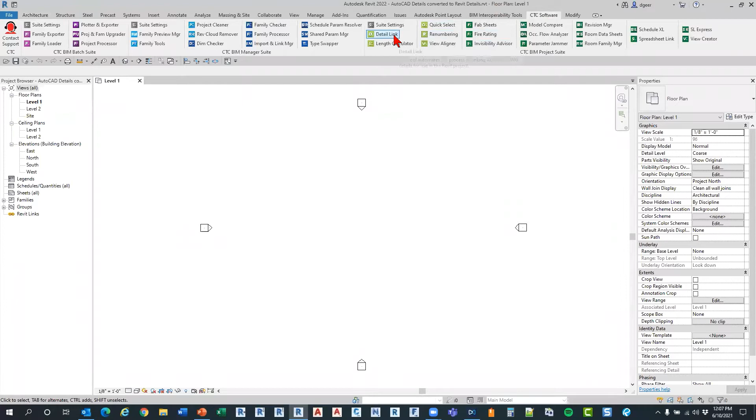Okay, thank you. So I'm going to come over to our CTC tab here, and I'm going to grab the detail link tool. What this allows me to do is browse out to my server where these details are located. I've just got about 4 here. I could go grab one that's got 1,000 details. It's up to me, but I don't want to inundate everybody with 500 details. I can bring in just 1 or 2 details, or I can select all details and add them all at once.

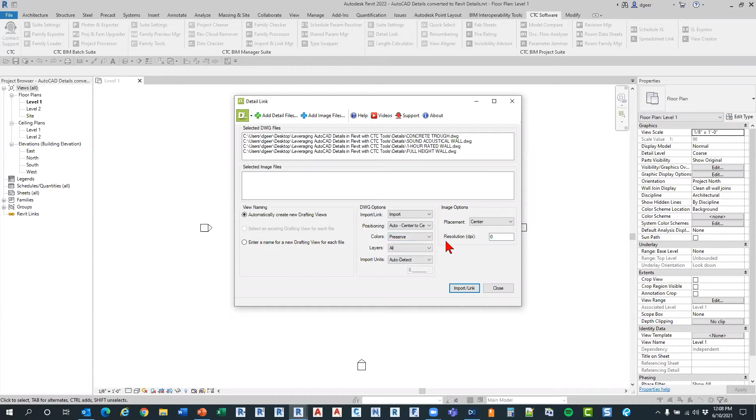I'm going to go ahead and hit OK here. When I do this, how do I want these items to come in? First, I'm going to tell it to import versus link, because I want to take these AutoCAD details and convert them over to Revit details. I don't really care about positioning so much, but I could. Do I want it to preserve colors or black and white? I'm going to tell it to preserve colors, because one of the other tools I want to use needs to know that I've fully translated the AutoCAD detail over to Revit information. How do I want to handle layers and import units, especially from manufacturers? I don't know, I could say visible, or I could say all. I typically don't know, so I'm going to say all.

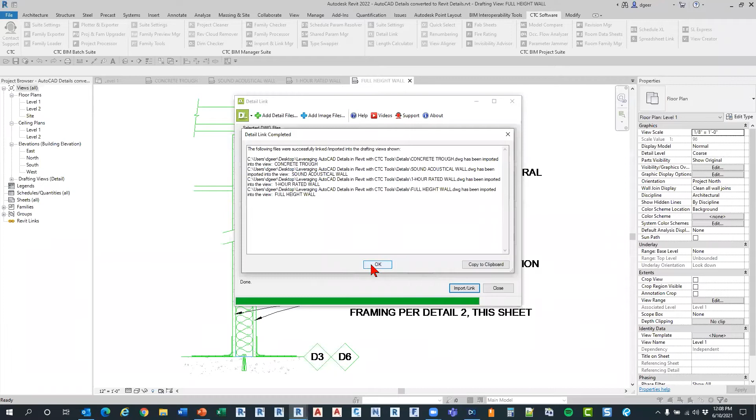I'm going to go ahead and hit import link, and it's going to bring in all those files and give me a report of what's going on with those files, so that if I had any errors, it would give me an error log.

That quickly brought in those 4 AutoCAD details. I'm going to hit WT on my keyboard, close out of level 1, and then hit ZA on my keyboard to zoom all to fit. So now I've got these AutoCAD details, and you can see the colors and items of that nature.

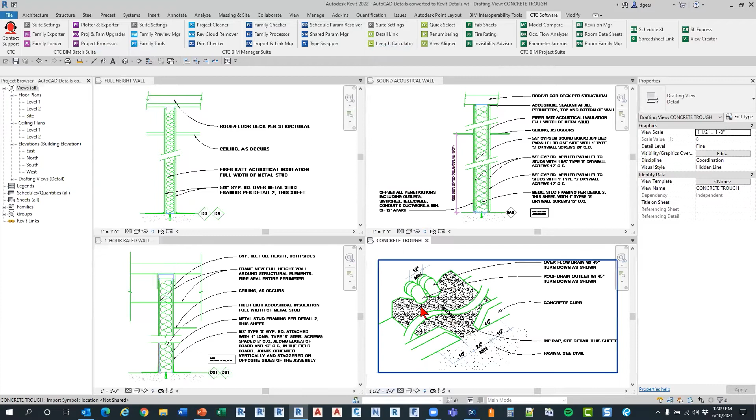One thing it didn't do was set the appropriate drafting view size for these details, so I'm going to come in here and set these to the appropriate size. This last one right here is actually 1.5 inches. Well, it didn't look like it changed anything, because these are still seen as an imported symbol.

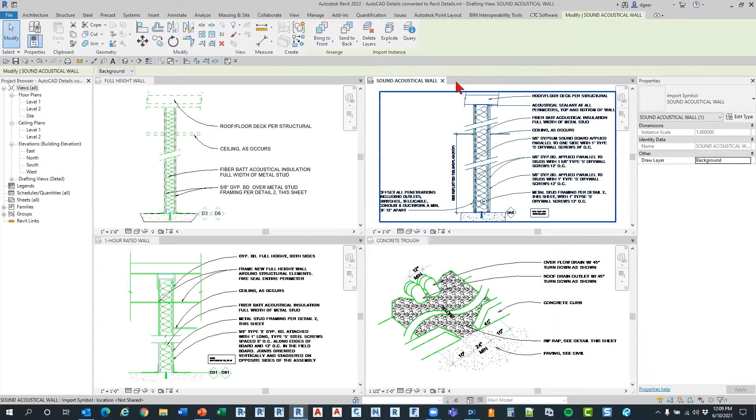One of the things I really need to do here, that we always say don't do in Revit, is come in and import and fully explode, right? It leaves a lot of AutoCAD residual information that Revit does not like. So I'm going to go in here and fully explode all these items, which everybody knows is always a big no-no in Revit. The reason I want to do that is because I want these items to come over properly, so that if I change scale, the text and whatnot will change with it.

So now I want to get rid of these items in here and say, okay, you're going to be on the appropriate line style. I could come in and say, hey, you're really on thin lines. That's a lot of picking and clicking to do.

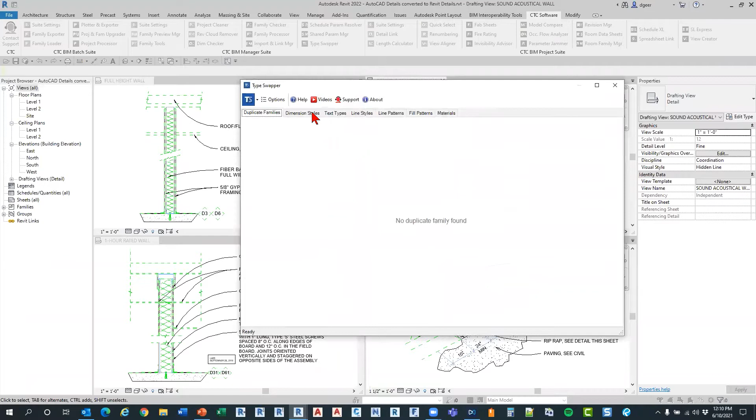What I'm going to do to speed myself up is use the CTC tools type swapper. This allows me to come over here to the text types, and everywhere you see a check mark means those are approved text types available for me to use, approved by my company. You'll see all these with 1 hour, concrete, sound, acoustical - those are the ones pulled in from AutoCAD.

I could sort it by count type and say, okay, these elements all have something on them. My sound acoustical wall, I can say that they need to be an 1/8 inch arial because they were really an 1/8 inch arial in AutoCAD. My 1 hour, same thing. My concrete, however, those are 3/32 inch arial, and I've got 9 here on this full height wall, so I'm going to set those to 1/8 inch. Acoustical sound 3, I'm going to set to 16th and 16th, and there's one here I'm going to set to an 1/8.

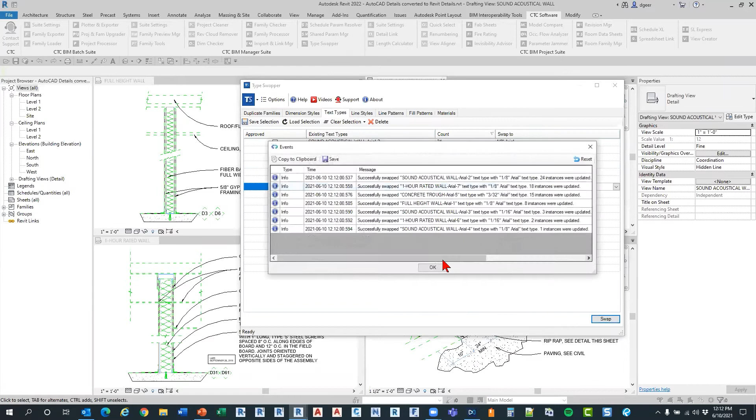So what I'm going to do is go ahead and swap those out. Now if I go back into each view, you'll see that everything is now on an appropriate Revit text style or text type.

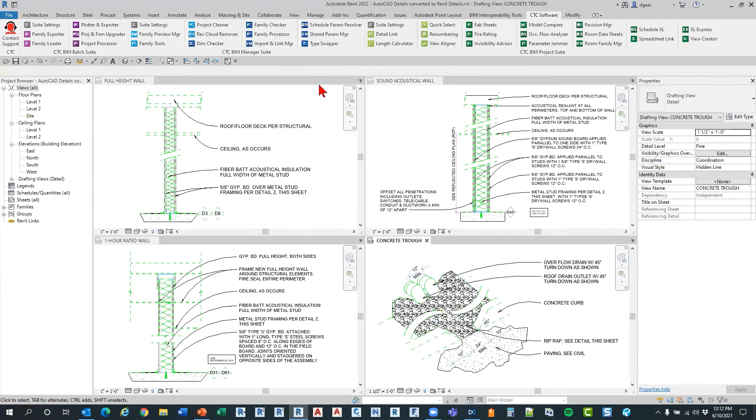So if I go back into the type swapper, if these elements had dimensions, I could change out the dimension style - well, none of these have dimensions on them. You saw earlier where I could go through and actually pick the different lines and change them, but that's a lot to do, especially if there's 625 of them.

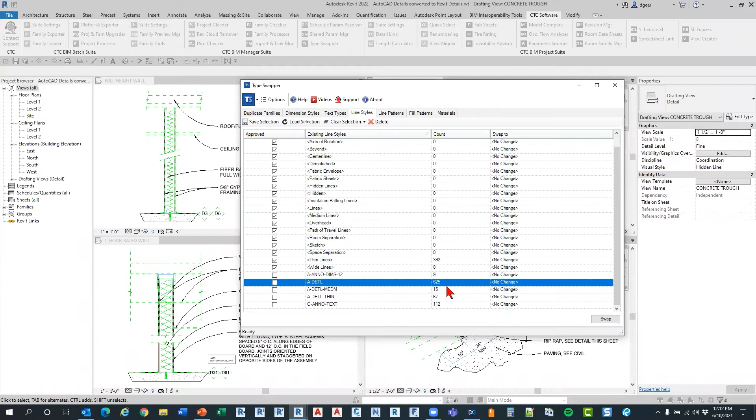So I'm going to come over here to a detail, and I know those need to be thin lines. Any of these annotation symbols, I'm going to make them thin lines. Obviously detail thin - I would assume if they're using AIA standards or good national CAD standards, these are going to conform to medium thin lines. Once I have them all set up here, I'm going to hit swap.

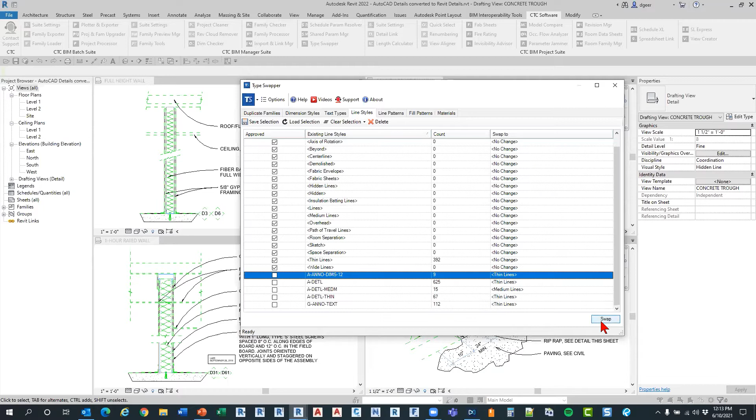Now, I will tell you, ladies and gentlemen, this is going to take some time, so we're going to have a little dead space here. When I launch this, I'll see if there's any questions I can answer while this is going through, because I did this earlier for the 4 views we have. It's approximately going to take 1.5 minutes per view, so we're looking at around 6 minutes for the type swapper to go through and change all these out. So if there's any questions, feel free to ask.

So where do you get the CTC software? That's a great question. In the United States, ATG USA is the authorized reseller for CTC software. If you're in Canada, SolidCAD is your authorized reseller for the CTC software.

Now I'm actually using 2 of the different suites here. Okay, hold on just a second, I see that there's some questions here.

So Dan, to answer your question - you asked, you normally wouldn't want to fully explode imported objects in Revit, but you're saying that to use these CTC tools, you do need to, and yes, that is correct. I need to, in order to be able to put them on the proper Revit line style, the proper Revit text type, to get rid of all that AutoCAD information. I'm hoping that answered your question, Dan.

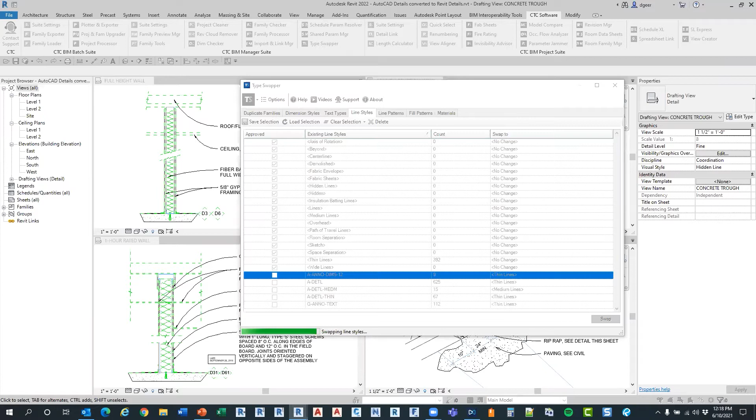And we're almost getting, hopefully, towards the end of the CTC tools Type Swapper conversion. Again, I'm only doing 4 details, but if I was trying to convert my AutoCAD detail library and having to go through and do this on every detail, that would be extremely time consuming, if I want them to be truly Revit details and no longer AutoCAD details. Because these 4 details are taking us approximately 6 minutes, I would definitely look at setting this up to go before the end of the day, and let it run through the night.

And then when you come back in, I know I'm going to get a message saying that one of the elements needs to be disjoined, but hit that and then it's done doing the conversion. And then all you've got to do is minor cleanup, and then you have those AutoCAD details now as true Revit details.

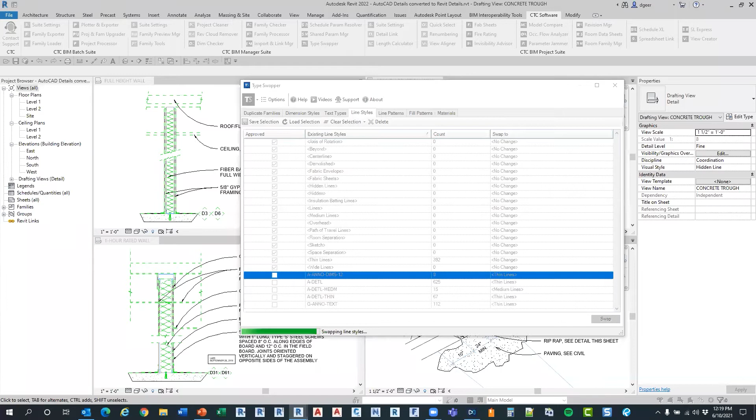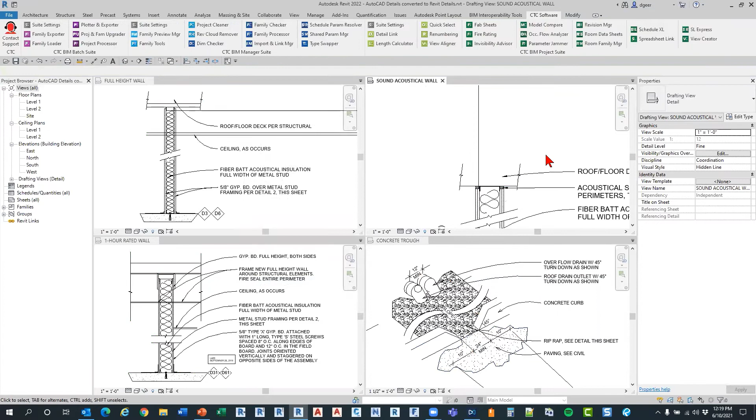All right, there's my unjoined elements like I was telling you earlier. Here's my report based on what was going on. I'm going to go out to Type Swapper, and you can see it swapped all those out for me, and it put it on the appropriate line type. I don't know why it wants to move this for some reason, but I'm going to go ahead and bring that back, delete that line type there. That cleaned that up.

Again, it moved this one out. Why, I don't know. But hey, you could actually get the same thing from whatever CAD details you may pull off the internet from your vendors. Same things could happen with them. So I'm just kind of coming in and doing a little cleanup work here. And then I'm going to draw a detail line here, because I want it straight and not on an angle. And that one looks like it's cleaned up. This one I've got to clean up here. And so now I've got all those 4 details.

They are now converted. Now I could use the CTC tools Type Swapper for fill patterns, but I find that that one doesn't do what I want it to do. It will go into this filled region here, edit type, and change out the fill pattern that is assigned to it to the appropriate one. But what I typically want is for this fill pattern to actually be the fill pattern that is in Revit. So I'm going to come in onto one of these views, right click, select all instances, so that it grabs all those fill patterns at once, and then I can change them to concrete.

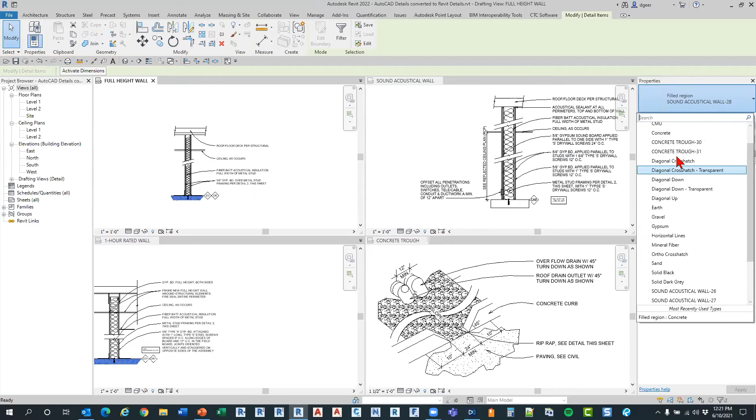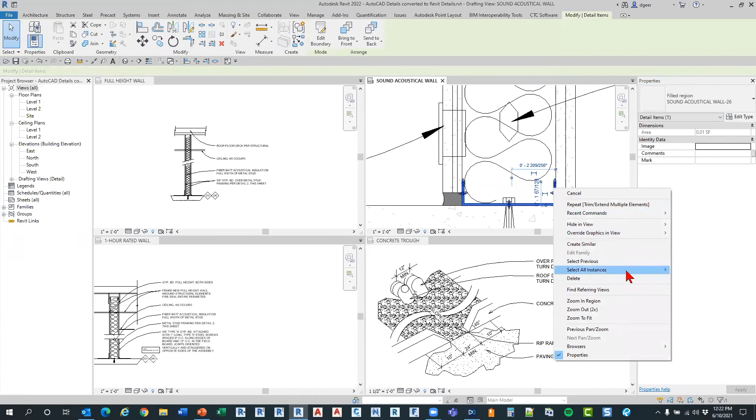Same thing here with my gypsum board. Almost forgot what it was there, so sorry, I had a pause there for a minute. Change those out to gypsum board. Got a few solid fills here that I want to switch out. Same thing here with the solid fill for the stud. And then I'm going to do the same thing here on my civil detail. And that is not supposed to be concrete. That is supposed to be gravel, and that one is supposed to be sand.

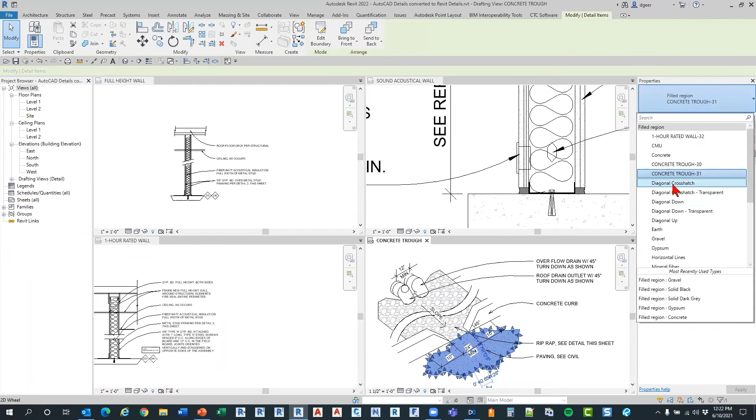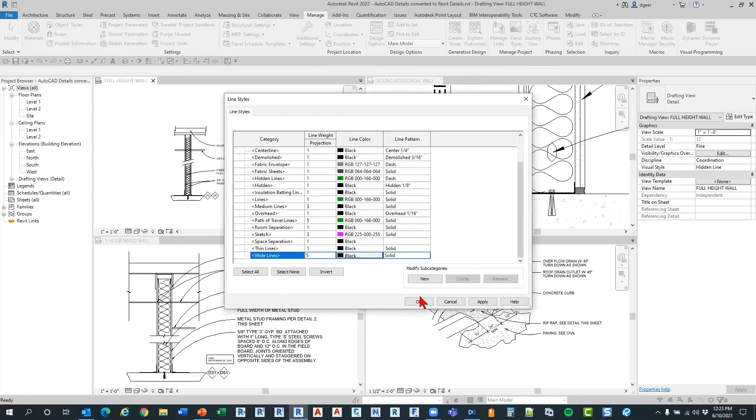So a little minor cleanup, but once I got everything done, now all I have to do is come in through my Manage, go ahead and Purge Unused, and then I can go to my Object Styles. Nope. Stand corrected. I'm going to go to my Additional Settings. I'm going to go to Line Styles, and then I can now get rid of all these AutoCAD layers that no longer have to be tracked and viewed by Revit.

So now at this point, I have these details ready for me to use in Revit. They're no longer AutoCAD. I've gotten rid of all of that AutoCAD residual information, all the fill patterns. I might come back in and purge out the fill patterns and everything else. So that way I no longer have that AutoCAD information that slows down Revit.

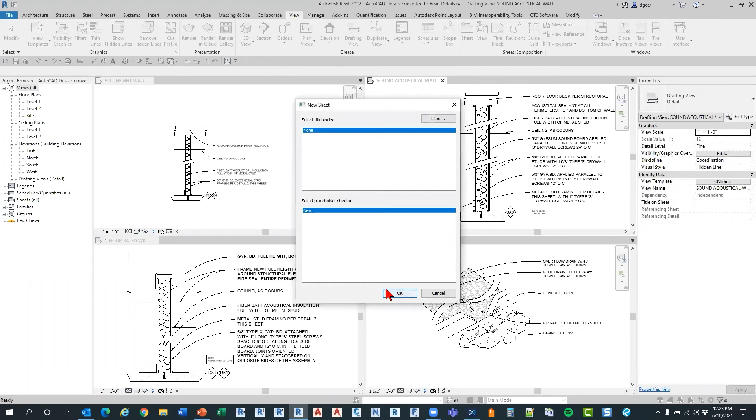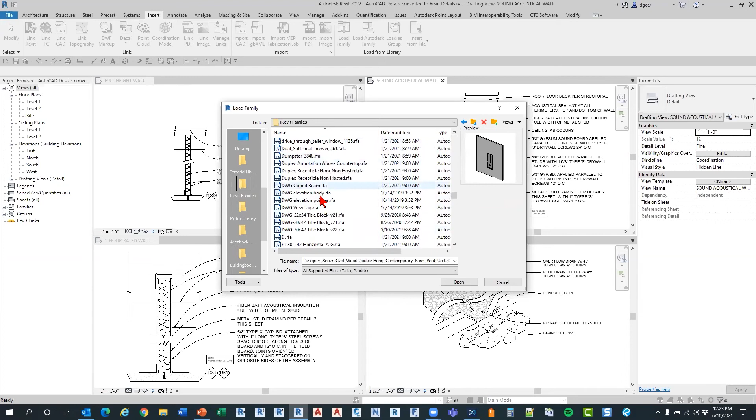At this point, I'm going to go ahead and create a sheet. And I purged one too many times, so I've got to go insert a family real quick. Bear with me while I go grab a title block. And let's go ahead and create that. So I'm going to hit WT or TW to tile my windows back and ZA to zoom all.

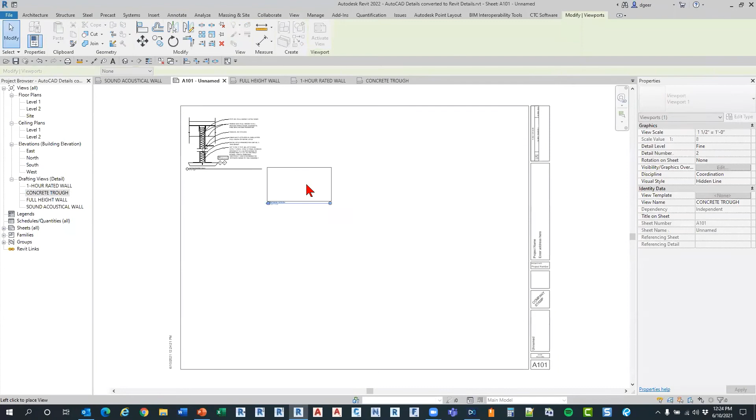I'm going to expand out my project browser here and grab all these different views. And yes, I am putting them crazy on purpose. 2, 3, 4. All right. So there is now on CTC Tools, under the free tools, this new View Aligner.

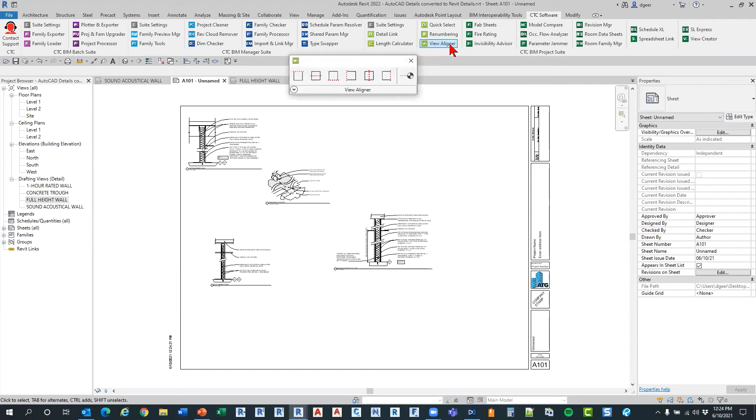And this not only works in Revit 2022, as you see on here, I've actually used this tool in Revit 2019. So if you get the new CTC Tools, they will work back for the older versions of Revit. So what this View Aligner allows me to do is come in and use the crop regions to align my views. So I could come in and say, hey, I want to top align all these views.

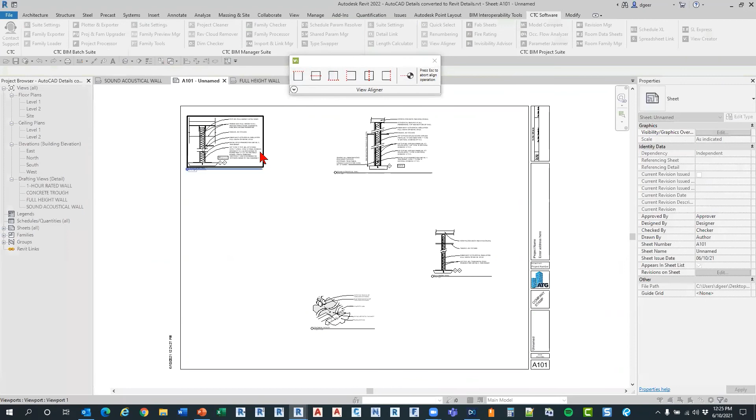And I grabbed one too many and aligned that. So I'm going to move you out. I'm going to move you down. And I could say, hey, I want to align all the bottom ones here. And I'm going to go ahead and slide this on over. And I could say, hey, I want to center you based on that one. And I'll bring you right back up.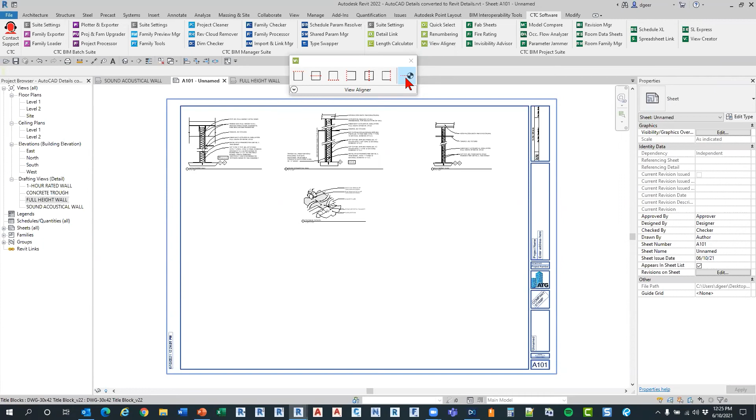Now, the very last one you see right here, it says Align by Levels. The reason why I'm not showing you that one right now is because the details I have do not have level markers in them. So if I have section cuts, elevations, whatever it is that I have, as long as it has a level marker. So I'm going to go create a new sheet here. And I'm going to come in and just drag in a couple of elevation views. Yes, I know they're blank, and I'm doing this on purpose here.

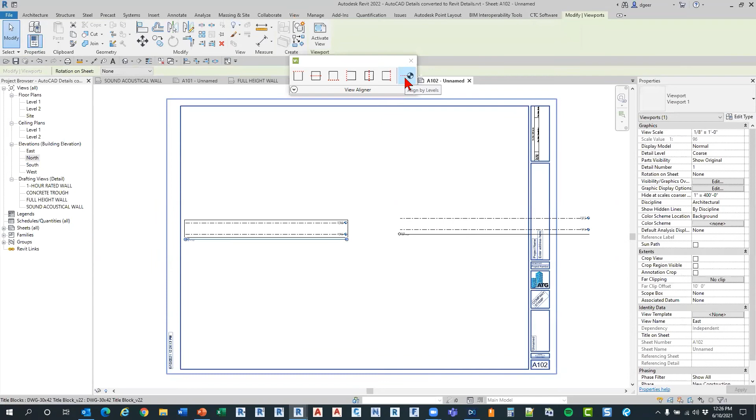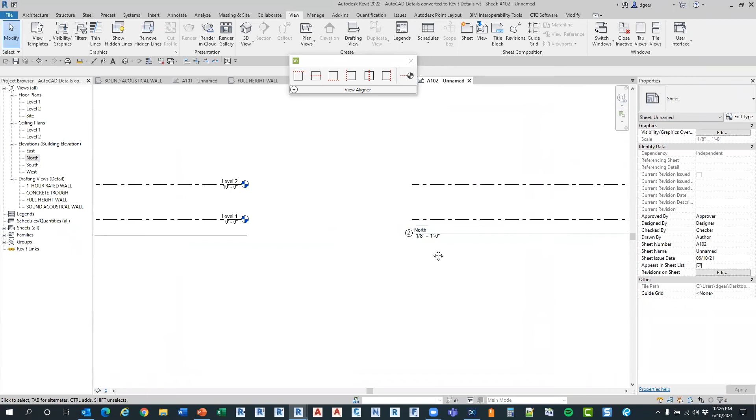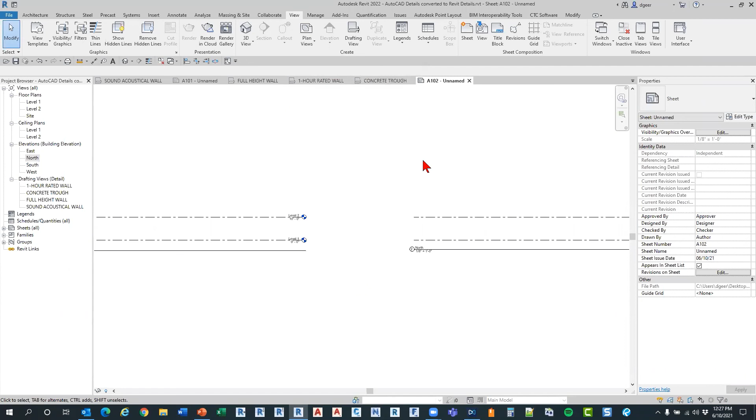So if I come in and use the align views, it will come in and shove them down by the level markers so that I know that they're right in line, because the crop regions are not always square from one area to the other. But that utility only works if the views are the same scale. So if I have one view that's 1/4 inch, one that's 1/8 inch, or one that's 3/4, one that's 1.5 inches, they're not going to align level markers at this time. I will say that in future releases, CTC Tools is looking at trying to do exactly that with the different scales. So with that, I am going to see if there's any other questions.